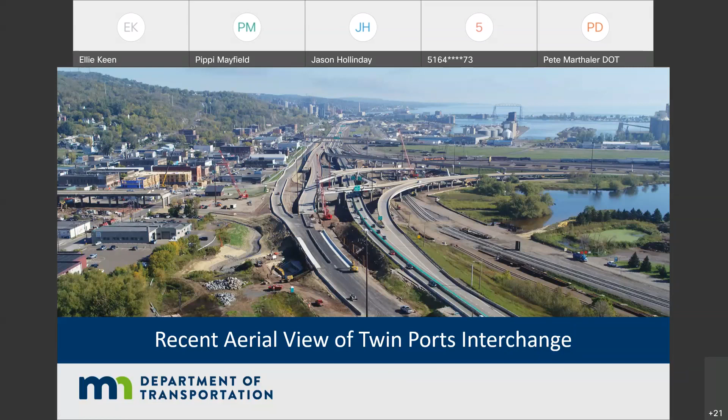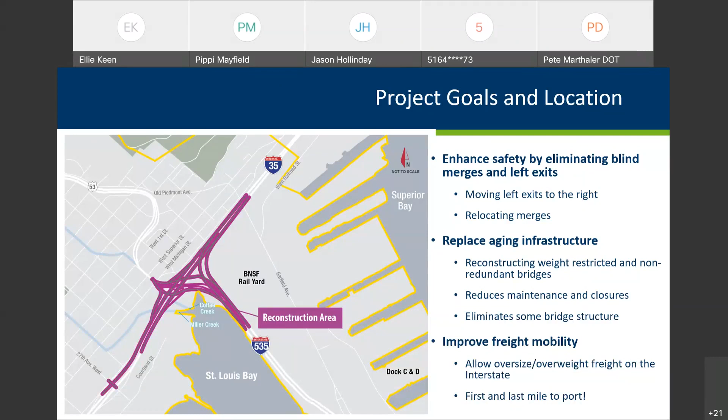Some of the project goals are to enhance safety by eliminating blind merges and left exits, replacing aging infrastructure, and improving freight mobility. This project is located on Interstate 35 between Highway 53 and 535.

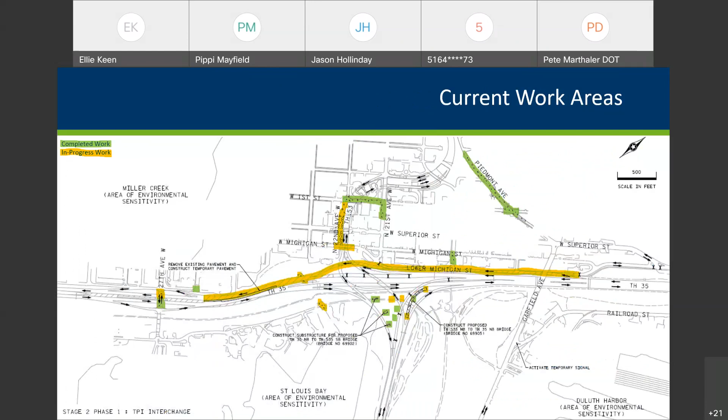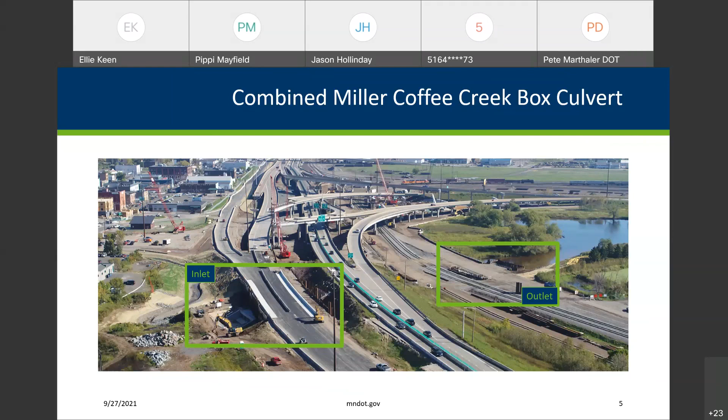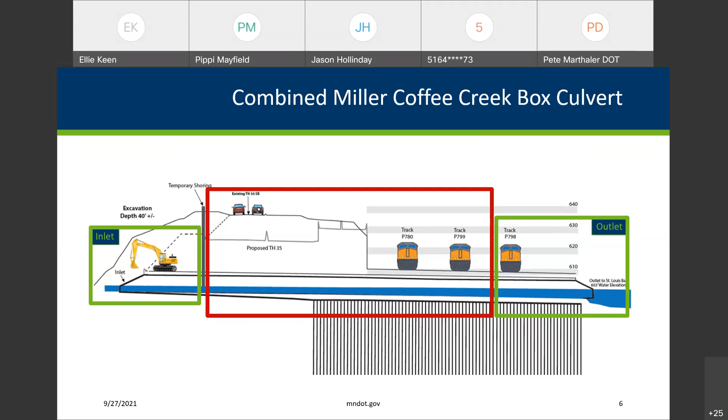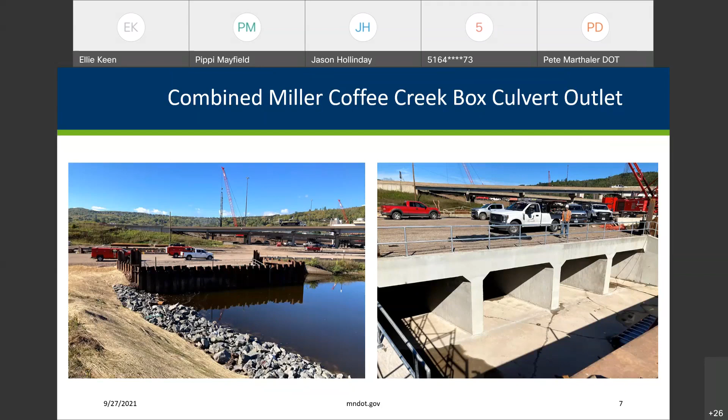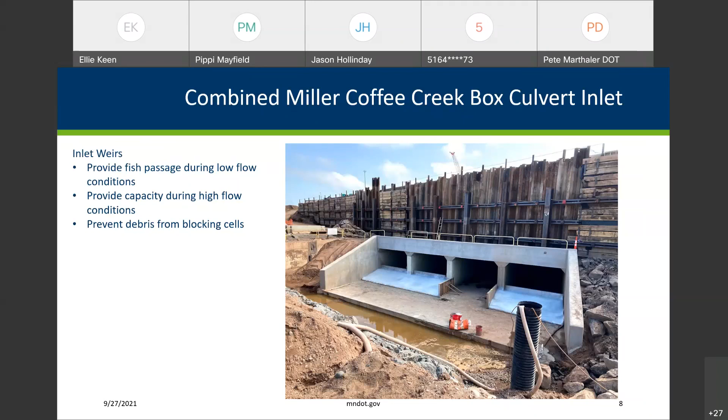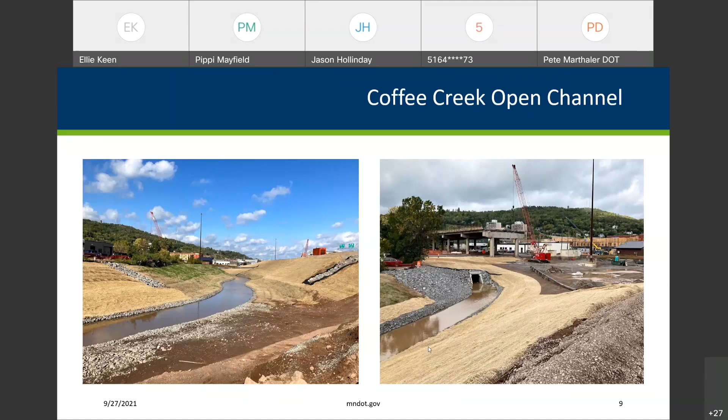Moving upstream, this is the Coffee Creek box culvert, moving under 22nd Avenue. 22nd Avenue has been closed for a while, and this is one of the reasons. Coffee Creek is currently in this old brick arch culvert underneath the Highway 53 bridge, and with all of the construction and weight being put in that area, the culvert is just not suitable.

That culvert was built in 1894. It's time for a new box. So the box is underneath 22nd Avenue, and it will run up until First Street, where it will be connecting to the existing culvert.

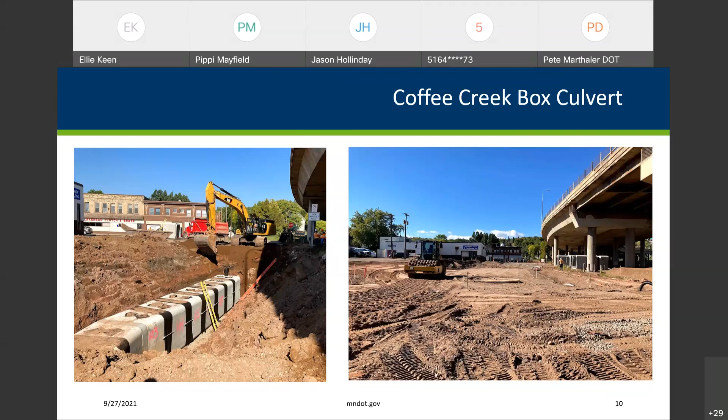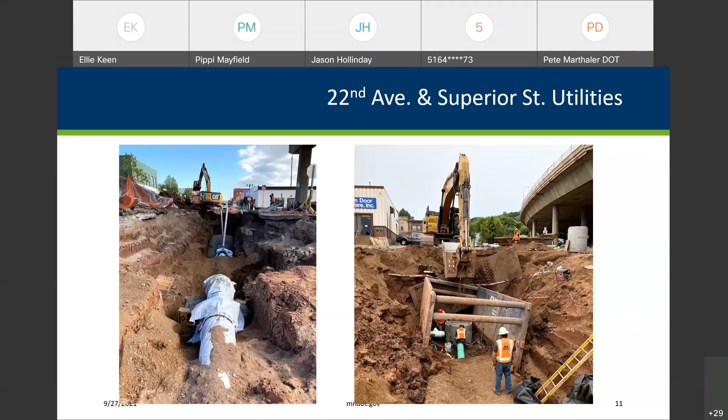It couldn't go in the alley underneath the bridge, so it had to be routed down onto 22nd Avenue onto Michigan Street. Just like the picture before, that is all backfilled and graded, and that is ready for surface drainage and paving.

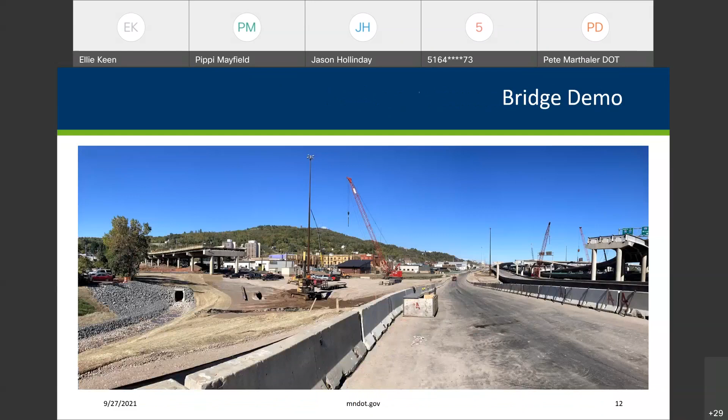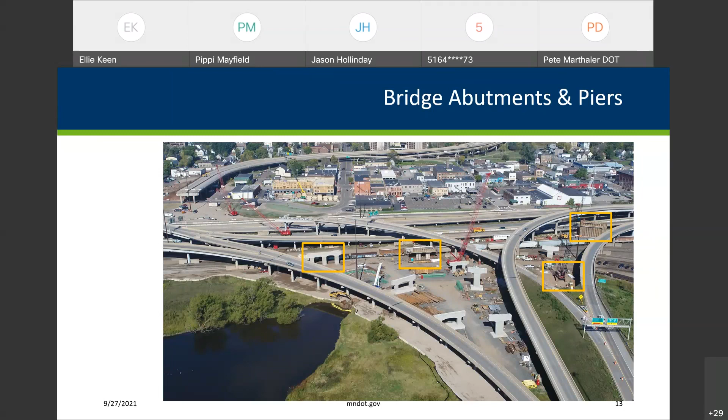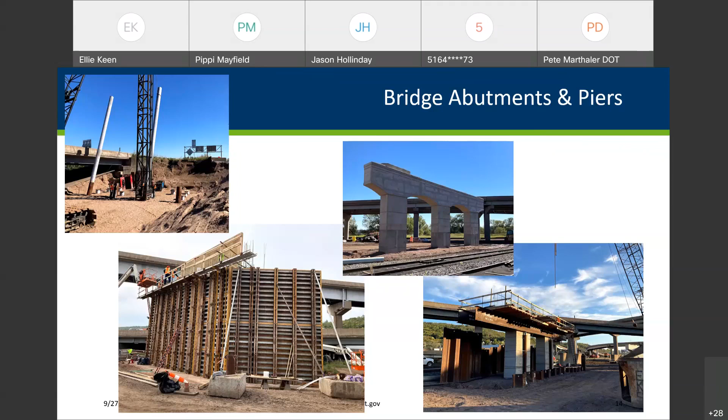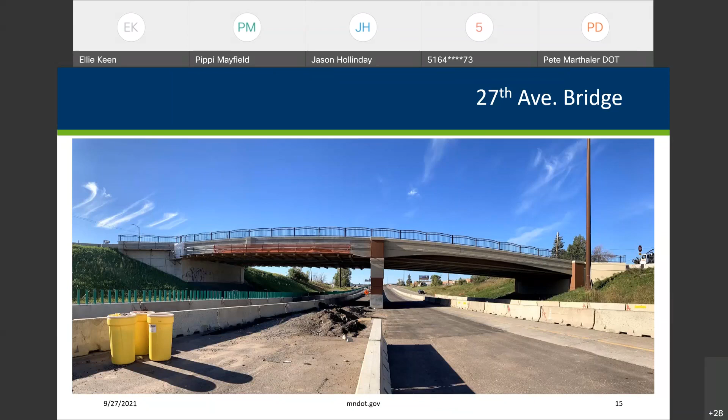Eventually we will be moving north and southbound 35, which I'll talk about in a little bit, under the right side of this photo, so we can paint and do some more work on the project on the left side.

So there's a lot of traffic impacts that are happening. Specifically, Superior Street is still closed at 22nd Avenue. That has a tentative reopening of October 8th. That is pretty dependent on weather.

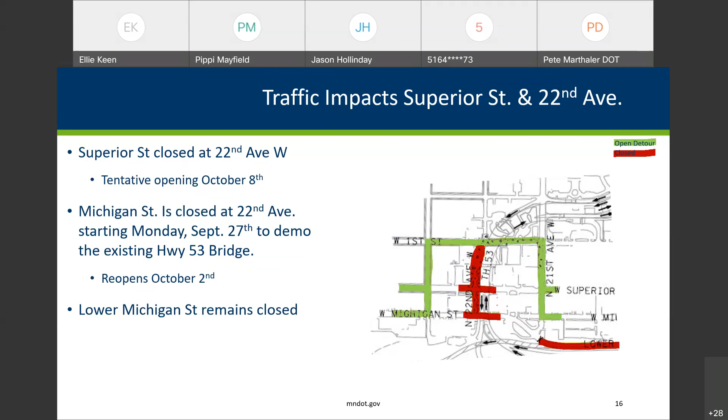Michigan Street is closed starting today at 22nd Avenue to start demoing the Highway 53 bridge. That bridge will be demoed a little bit past Superior Street for now, and Michigan Street will reopen on October 2nd. Lower Michigan Street remains closed, and that will remain closed for a few years so southbound 35 can use that area to drive.

So southbound traffic shifts starting today, September 27th. I've highlighted 35 southbound in yellow, and there's a shift from 35 onto Lower Michigan Street. That Lower Michigan Street turns into a bypass that will go over the inlet section of the culvert and then under 27th Avenue. So that shift should be happening by the end of the day today.

That will be 2 lanes, and just to get everything, all the signs, barrier and all set, it will be 1 lane for a bit, but by the end of the day tomorrow it should be open to 2 lanes. 35 northbound will still be where it is for the next 2 weeks, but starting today, the ramp from southbound 35 to 535 has been closed. So keep in mind as I switch to this next slide, pay attention to 35 northbound.

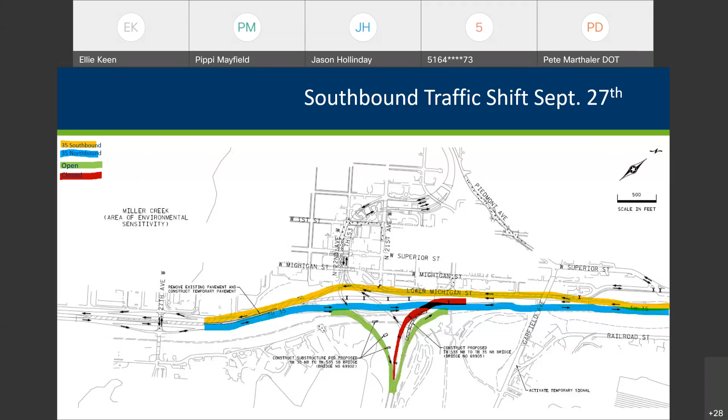35 northbound will also be flipping starting October 8th. It will be moving to the previous southbound lanes, and that will provide a lot of room for being able to construct everything to the east, or the bottom half of this diagram. With that switch, the ramp from 35 north to 535 is going to be closed. The ramp from 535 to 35 northbound will remain open for a few more weeks.

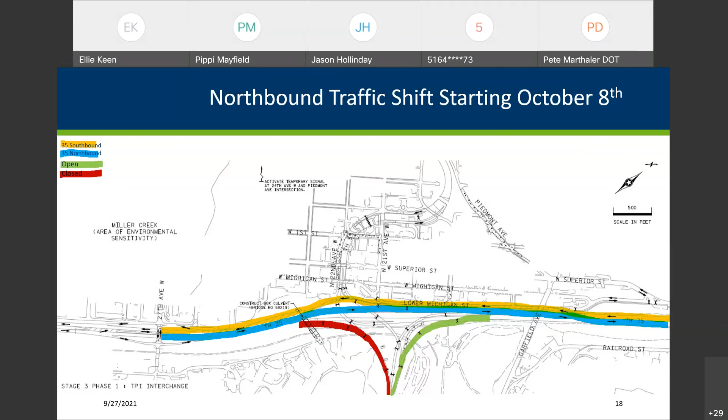I wanted to give you a bit more of a bird's eye view using these pictures. Starting in the left picture, you can see that there will be 2 lanes of traffic. It will shift from 35 where it is now onto this Lower Michigan Street, and northbound will also be switching back into the normal configuration. That's at the north end of the project.

Switching over to the right picture, 35 southbound will be traveling along Lower Michigan, and that will be happening for the next few years until late 2023, maybe early 2024. Northbound will also be switching into the old southbound lane, so it'll be nice to have 2 lanes of traffic, because no one has liked this 1 lane of traffic deal all summer. It will be great for winter season and snowplowing, and much safer.

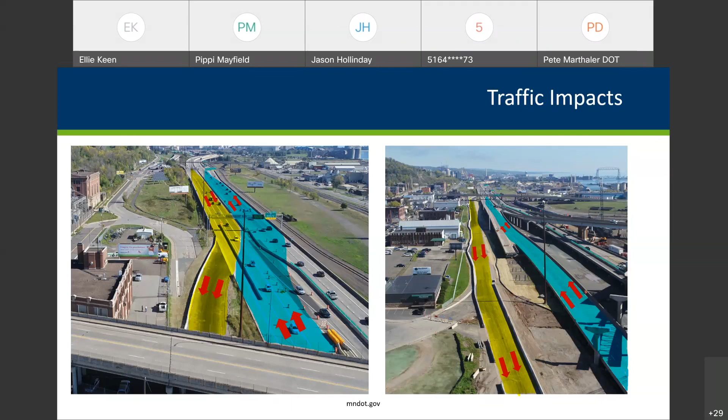If you do a 180-degree turn in the air, you can see where southbound is headed. Southbound is headed over that inlet section of the box culvert, along with northbound. Just a reminder, southbound is highlighted in yellow, northbound is highlighted in blue. They'll both be going over that inlet section so the rest of the box culvert can be constructed.

If you look way over to the left of this picture, there are some white lines. Those are where the tracks will be moved onto the outlet section of the box culvert, just to provide a full working area for that box.

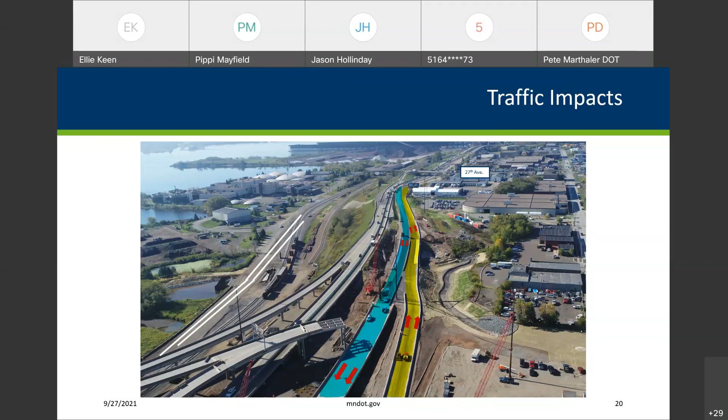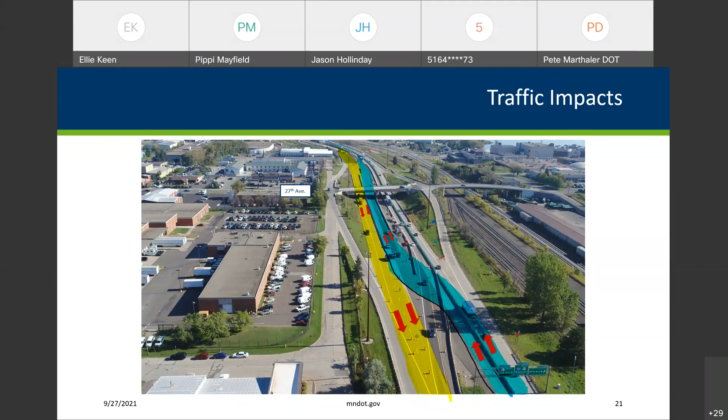And then onto 27th Avenue, where I've marked at the top left. Again, southbound is in yellow, northbound is in blue. Those will be moving back to the normal configuration just south of 27th Avenue. As you can tell, both of them are going underneath that 27th Avenue on the left side of the bridge, so we can paint the right side and do a lot of work on the right side of the entire project.

Superior Street access to Mesaba Avenue and I-35 southbound from downtown will open again by Friday, October 1st. That will provide much better flow of traffic.

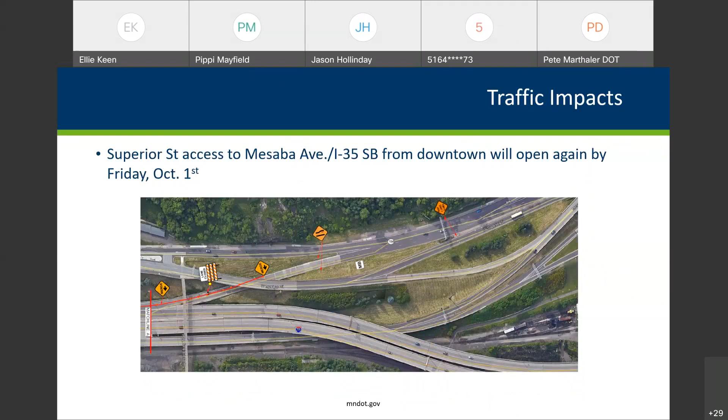I want to go over some of the detours with all of these closures. If you're going from 35 southbound to 535 southbound, just continue along 35. You can get onto the Bong Bridge and go over 2, and you can go onto Hammond Avenue or continue along Highway 2 to Highway 53. If you're going from 535 northbound to I-35 northbound, you can do the same thing: get off of 53 onto Highway 2 in Superior, follow Highway 2 over the Bong Bridge, and go north or southbound on 35 there.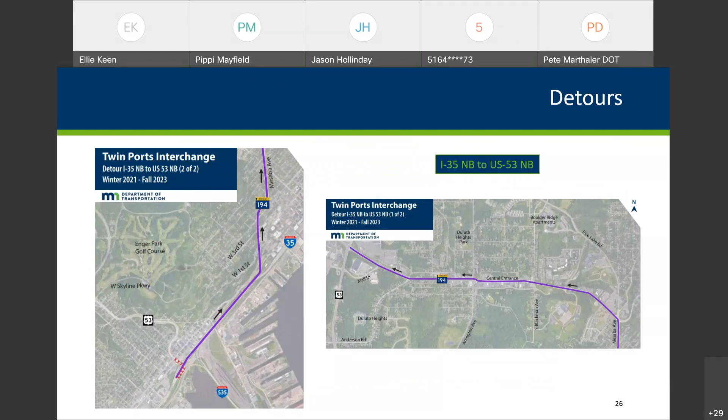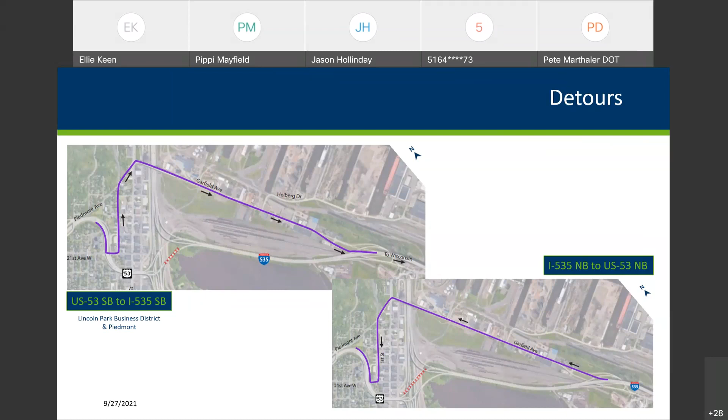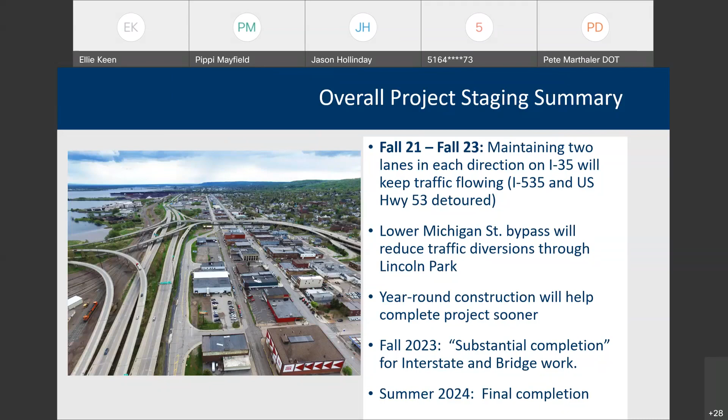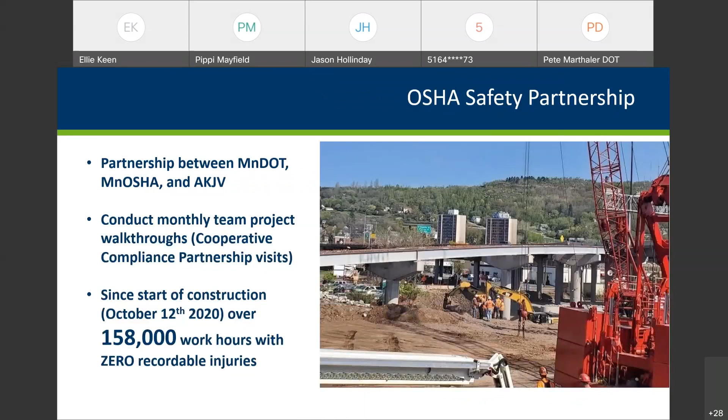So we have some updated billboards in place. We have a billboard on 53 near Hawthorne and one on 35 near Hinckley.

If you would like to call our hotline, it is 218-343-3748. You can use 511 for updates. You can Google Minnesota 511. It should come up. There's a lot of information on that site.

If you'd like to sign up for updates on the project website, below is the project website, and you can also just Google MnDOT Twin Ports Interchange, and it should lead you to that link.

There are some more posted videos. We have been creating original videos with specific information. If you really like hearing my voice, you can listen to the Miller Creek video that is on our website, along with the TPI progress update from July, bridge demo videos, and many more.

We'll be hosting these meetings regularly. Regular construction update meetings are still being held virtually. Details to attend will be on the project meetings tab. Recordings of the meetings are posted and can be viewed when convenient. So if you'd like to share this video with your friends, feel free.

Lastly, we have time-lapse cameras. They're linked to our project webpage. We have a time-lapse camera near 27th Avenue West pointing north and near Garfield Avenue overpass pointing south. Those are pretty sweet, so you should check those out.

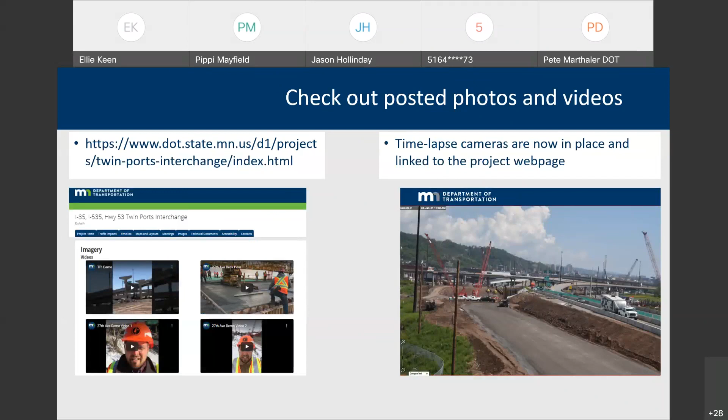Here is just more information about our website. You can see a lot more videos and the time-lapse cameras.

So we'll be taking some questions now, or you can reach out to Pete Marthaler, the TPI construction manager, or Pat Huston, the major projects engineer. Thank you.

This is Pete Marthaler, major projects manager, construction manager. I just want to provide a little bit of clarification.

Ellie stated in the presentation that Lower Michigan will be closed for the next couple of years, and that is correct. But the slight difference is that we'll be using Lower Michigan as a southbound bypass for the next calendar year, after which we're going to move southbound traffic up onto the newly completed portions. Lower Michigan will stay closed until about summer 2024 to give us time to rebuild and have working space for the demo and construction work for the southbound portion. We'll have retaining walls against Lower Michigan there, and we'll need space to build those up.

So, got a lot of people attending today, more than normal.